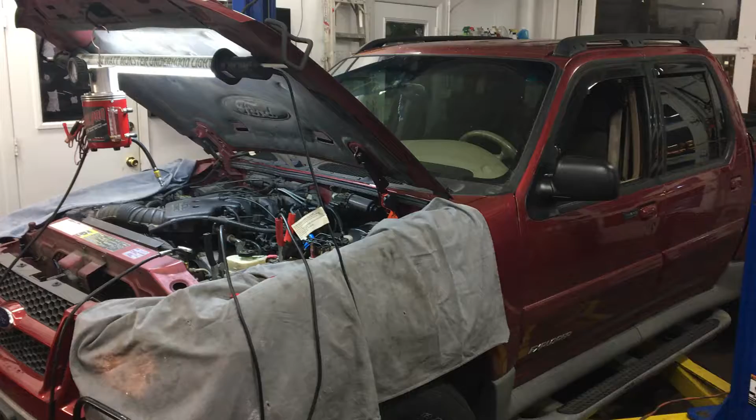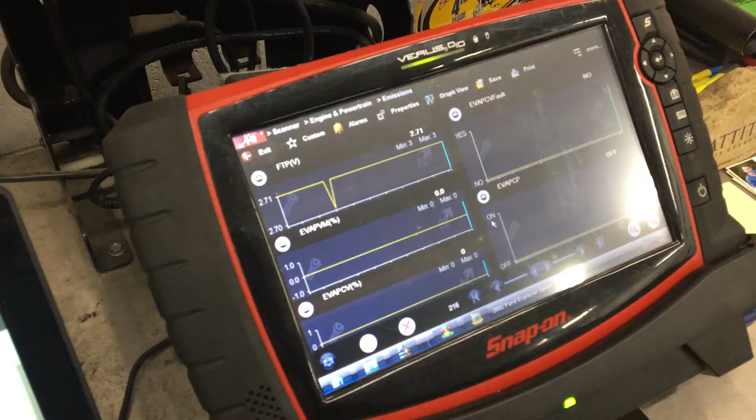One of my goals with starting Integrity Auto Care was to talk about EVAP codes and clear up a lot of misconceptions. This video is going to be short. This is a three-part series. First, I'm going to tell you about the EVAP system, then show you the cool tools. This is my operating table here. One thing I'm really big into is having the right equipment, so sneak preview, I'm going to show you Snap-on's newest Verus Pro, awesome machine. And then also how to fix it in the real world. So with that said, let's get started.

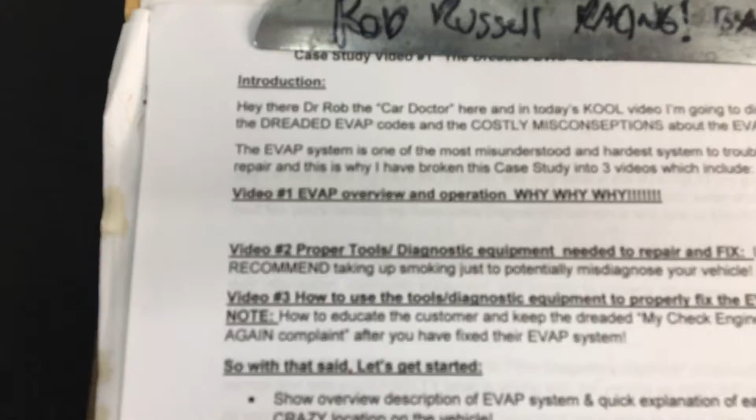First of all, just to give you a brief overview, let's go over here to my cheat sheet, make sure I'm following it right. So there you go, video number 1, EVAP overview and operation. For those of you that have troubleshot EVAP systems or had it done at a shop, it is kind of a crazy system, so I'm a keep-it-simple kind of guy. Here's the basic overview.

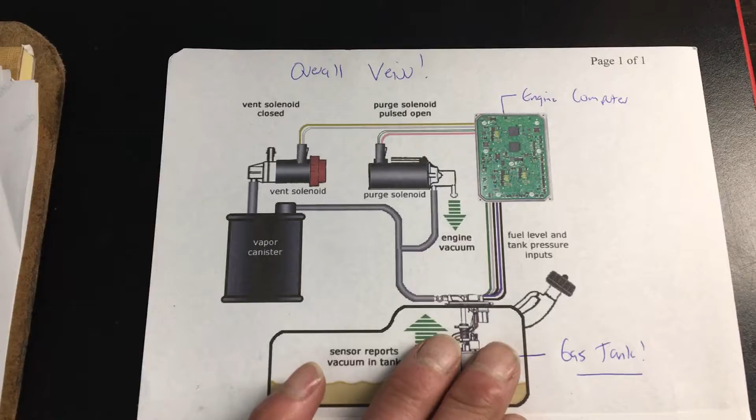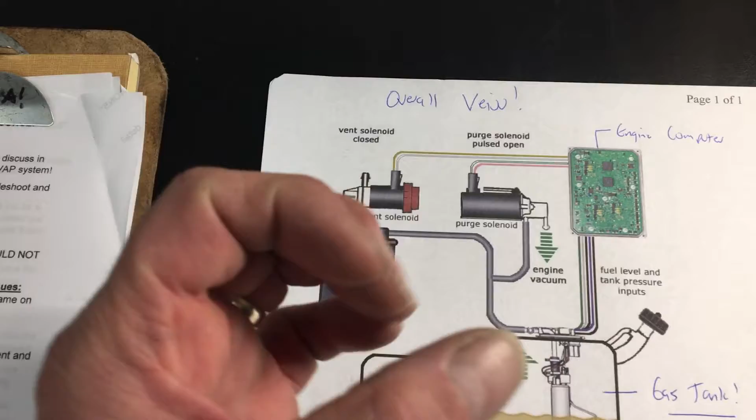You've got your gas tank here, and they do not want any emissions, vapors, floating to the outside. We're talking half of a mouse fart and it sets a code. So you got the fuel tank here that's got a sensor in there. You've got your vapor canister that overnight, or when the vehicle sits, all the vapors go into the canister. This is a charcoal type setup, absorbs the hydrocarbons. And then when the computer, this is your engine computer, commands, it says okay, I'm running, let's purge it by activating this canister purge valve, and it sucks it into the engine vacuum.

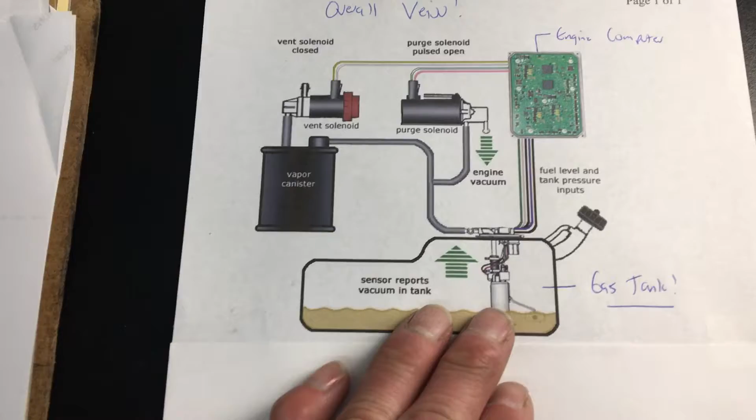It also needs to know, hey, I want to make sure the system's completely sealed, so it has the ability to activate this vent solenoid that usually is open to atmosphere, shuts this off, and it pulls a vacuum down on the tank. If that holds, no problem. If it doesn't pull down into a vacuum or doesn't hold the vacuum, it sets a code.

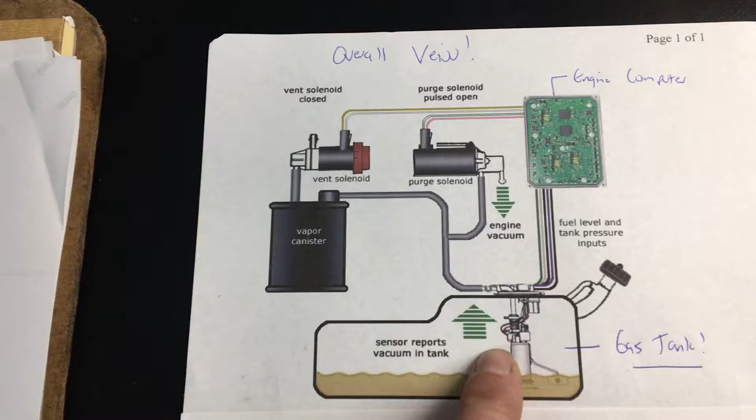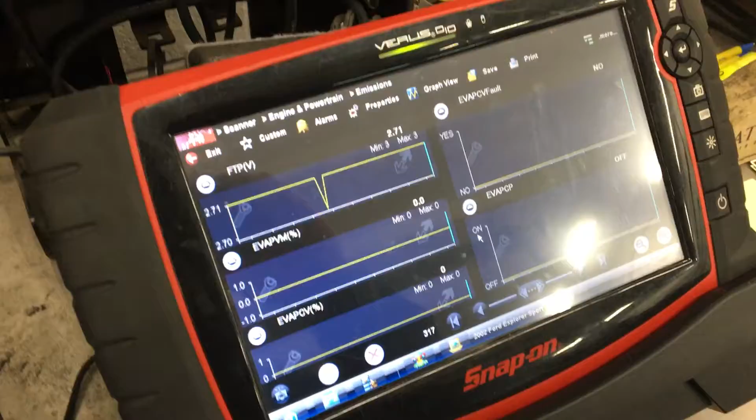Now, talking about codes and being real world here, there's a lot of misconceptions. One of them is, hey, can't you hook it up to that machine and tell me exactly what's wrong with it? Well, I love Snap-on, but you know, even this $17,000 workstation has been known to be wrong. It's just information, like an x-ray for a doctor, and the doctor, Dr. Rob, me, makes a decision off of that. So no, the machines can give us a good idea where to go, but it's not exact.

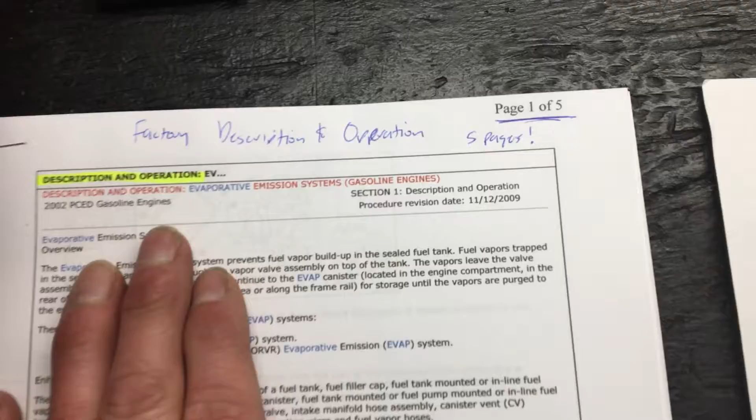And another one is, hey, just follow the manual step by step and it'll tell you what's wrong with it. So that's misconception number 2. This is description and operation, 5 freaking pages. Now, not to knock these engineers, they do the best they can, but these systems are so complex that each component has to be described and tested and yada yada yada.

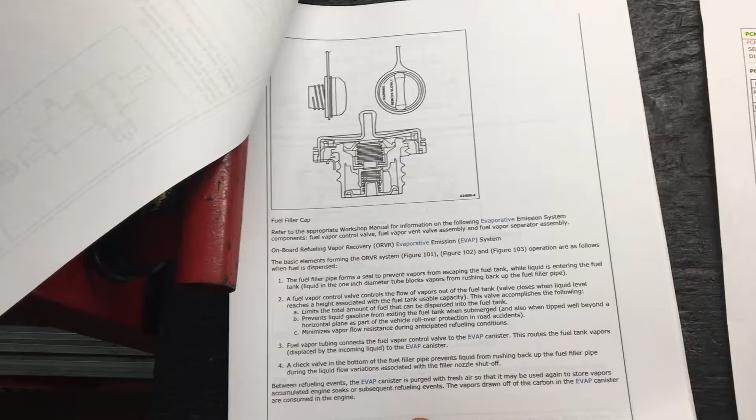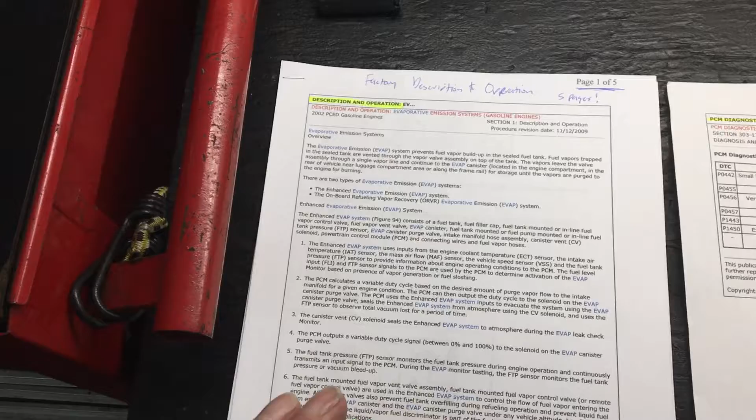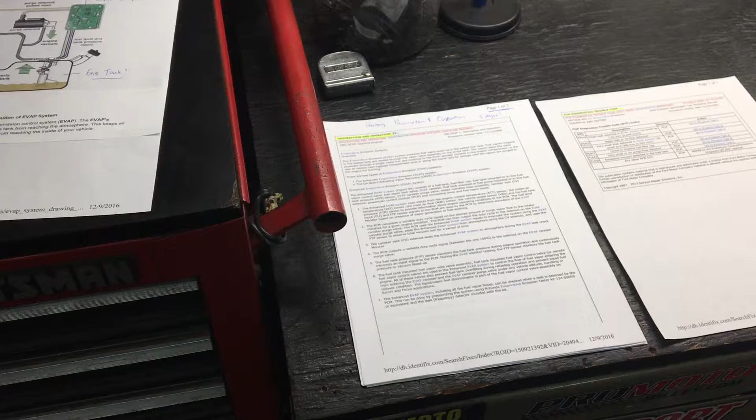Now I make these videos for my customers, for my fellow shop owners, and maybe you're do-it-yourselfers that are doing it. So here's the reality, shop owners: if you want to be the best of the best and be known as the car doctor in your area, you're going to have to take this stuff home and study it on your own time. I know that's a big pill to swallow, but I promise you it'll be well worth it when you get to be known as a car doctor.

Study this stuff on your own time. My motto is you've got to know exactly how the system works before you troubleshoot it. So with that said, here's some.

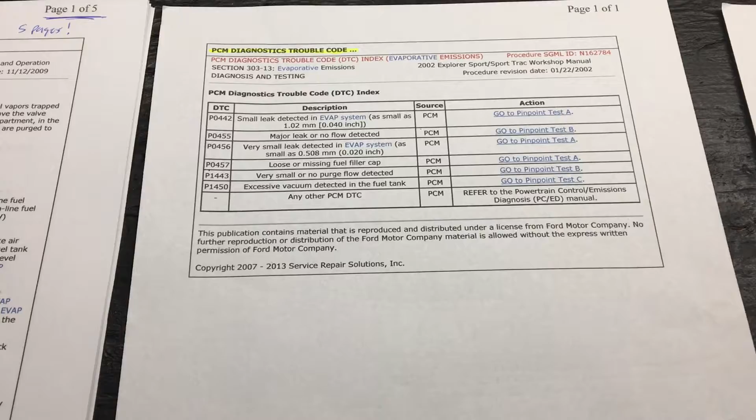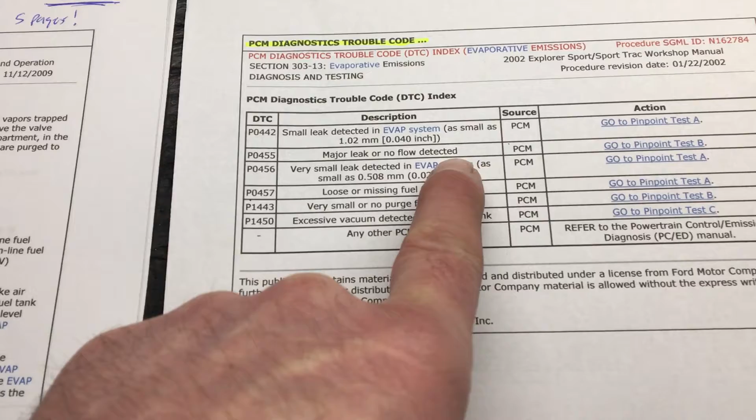Now these videos are quick and dirty, showing some of the codes. This one has a P0455, major leak, no flow detected. When we get to the testing part in video number 3, you're gonna love that. So here's the codes.

Some of the equipment you're gonna need, we'll talk about that a little bit later, what I do. So believe it or not, we're already at 4:30.

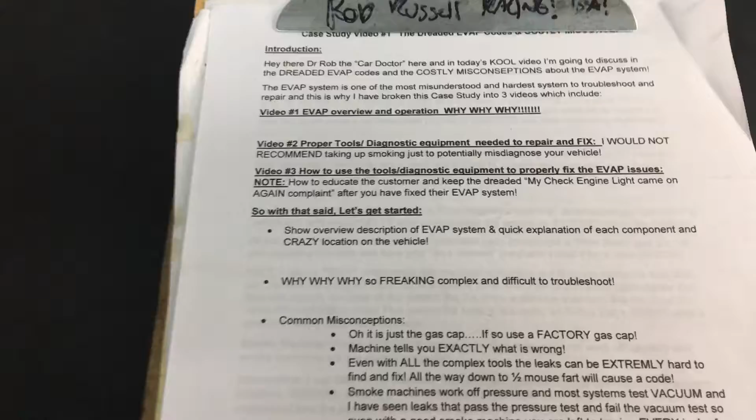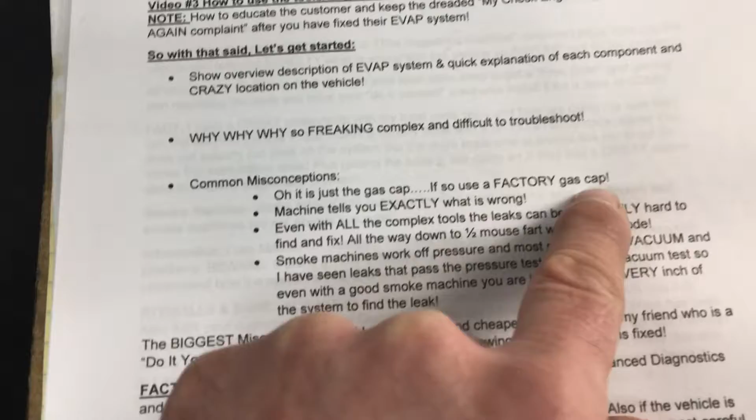So here's just a couple things to recap. Common misconceptions: oh, it's just a gas cap. Not always, could be, but if you do replace the cap, go with a factory gas cap. Machine tells you exactly what's wrong, we know that.

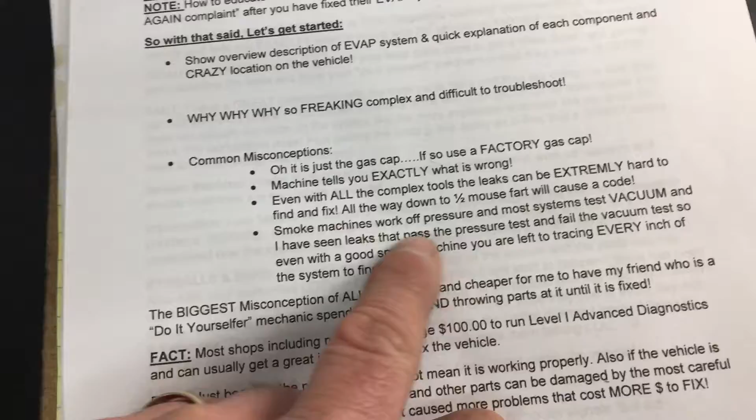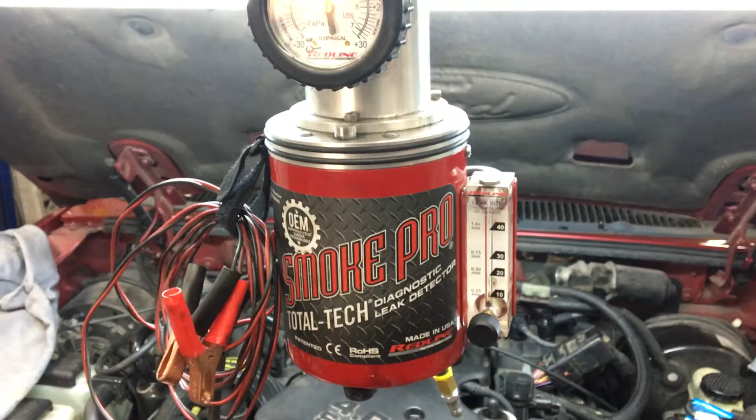Now here's the interesting part. I don't want to give this stuff away, this is in our other video, but the smoke machine works off of pressure, and most systems test under vacuum. So even with all this fancy equipment, smoke machines, a lot of times this piece of test equipment will not help you because it tests out okay under smoke, but not under vacuum.

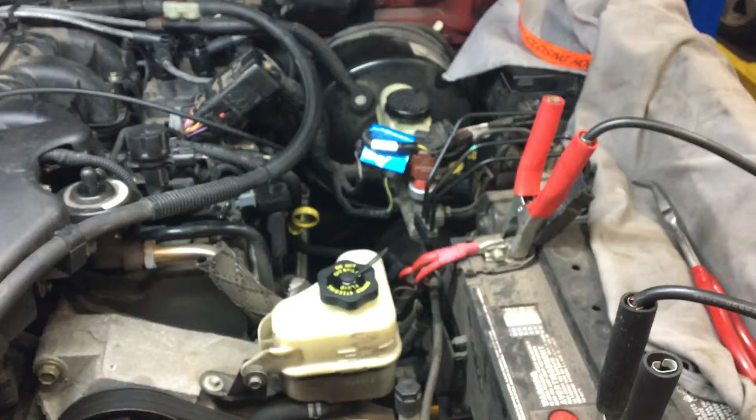That's pretty much what I want to do right now. I would show you where the components are in this thing, but they're so hard to get to, I can't even do that. So this is a test port where we hook up our smoke machine to.

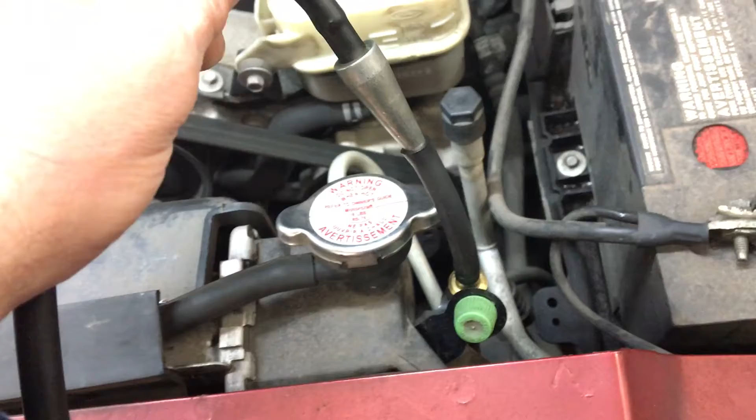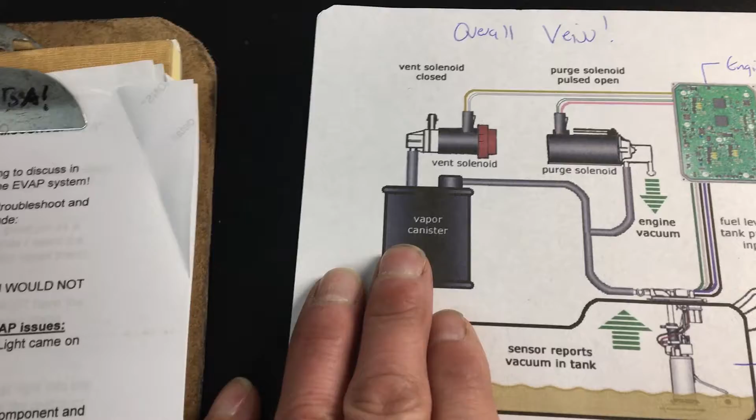So let's do a quick overview on what we talked about already. EVAP. Here's the components: gas tank, fuel tank pressure sensor, measures vacuum, canister, vapor canister. It absorbs all the hydrocarbons, stores them in kind of like a foam process. Then when the computer says, hey, purge it, it sucks it into the engine vacuum. This is your PCM that controls it.

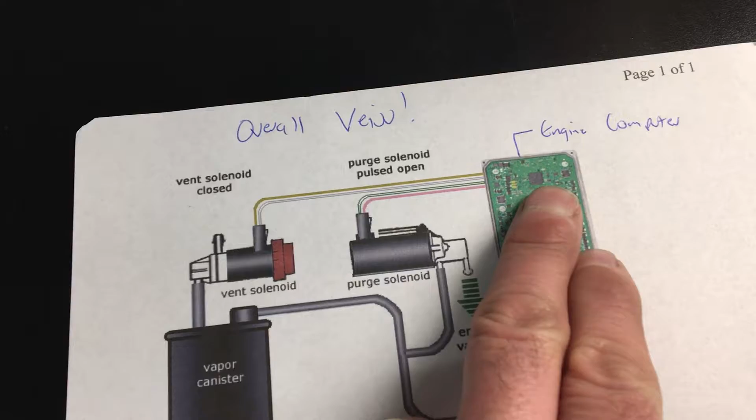Purge solenoid, vent solenoid. Vent solenoid is usually by the canister. Purge is usually towards the intake. Fuel tank pressure sensor is either inside the tank or right above it in the lines and that kind of thing. So with that said, that's your basic overview.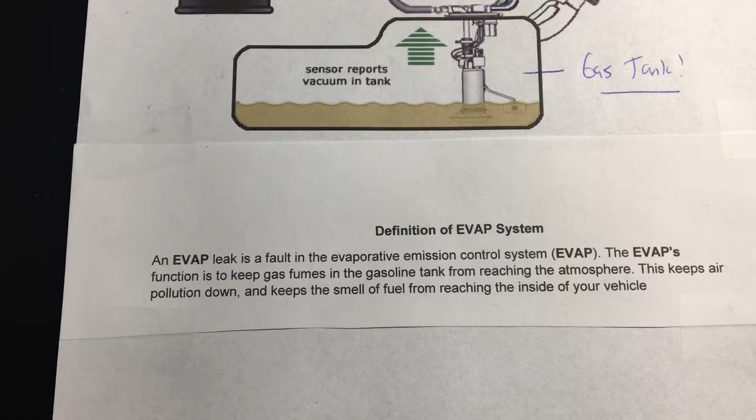And then one more quick thing. What the heck does EVAP mean? An EVAP leak is a fault in the evaporative emissions control system, the fuel tank, this whole process. The EVAP's function is to keep gas fumes in the gasoline tank from reaching the atmosphere. This keeps air pollution down and keeps the smell of fuel from reaching inside the vehicle. Now that's a big one, that's safety there.

So that, my friends, is it for video number 1. Basic overview showing you what it takes.

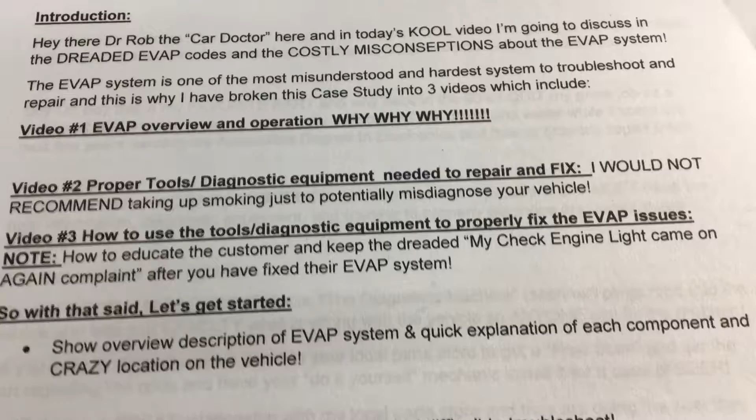Now, sneak peek, video number 2. We're going to dive into the proper tools and diagnostic equipment needed to repair and fix. I would not recommend taking up smoking just to potentially misdiagnose your vehicle. A lot of internet talk about smoking a cigar, cigarette, what have you, blowing in the intake lines, and I'm telling you, that would take a lot of blowing, my friends. So with that said, I would not advise that.

So video number 1, basics of EVAP on a 2002 Ford Sport Trac. Video number 2, I'm going to talk more about the tools of Dr. Rob and what I use to diagnose these vehicles and what I've used to become known as a car doctor.